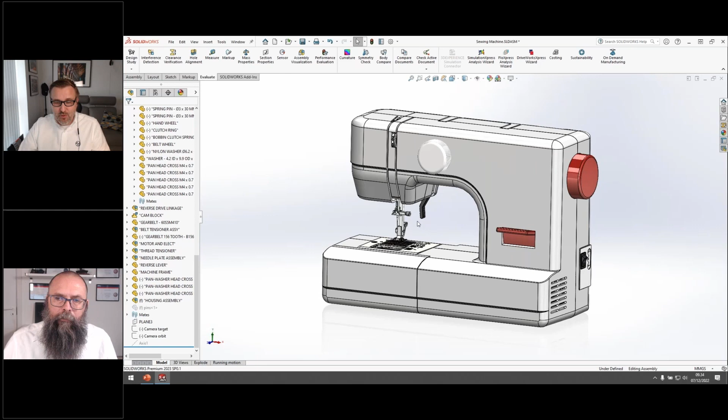Here we can see we have a sewing machine, and I have all the mechanism inside. A sewing machine can be a difficult work tool. There's a needle going up and down, so we need a little warning label on the inside here. So I'll just go in and open the part, turn around a little bit, and then on this surface I would like to have a warning label. If I right click, you can see there is a comment option down here, and I can go in and say add comment, and now we can go in and see - I want a warning label here, please.

So there's also options to go in and put in a screen dump of how the model is orientated, so it's easy to see how it's orientated. And we can also go out and browse and put in pictures from other sources, so we can in fact put in where the labels should, how the labels should look.

Sometimes if you have a lot of comments, you need a way to sort them, what is important and what is not important. And we can do that with different colors. We have different colors up here, and each of the colors can also have a description. If you click the little gear here, you come into options, and you can see here we have the description we could go in, so we can go in and say we want this to be warnings or something like that.

I'm just canceling out. But one thing is that it is important, and we want to emphasize that there's something important here. But what if people don't see that as a comment? Then there's an option so that every time we open this model, this warning or this comment should pop up so we can see it. So now I just press save and we'll just close everything here.

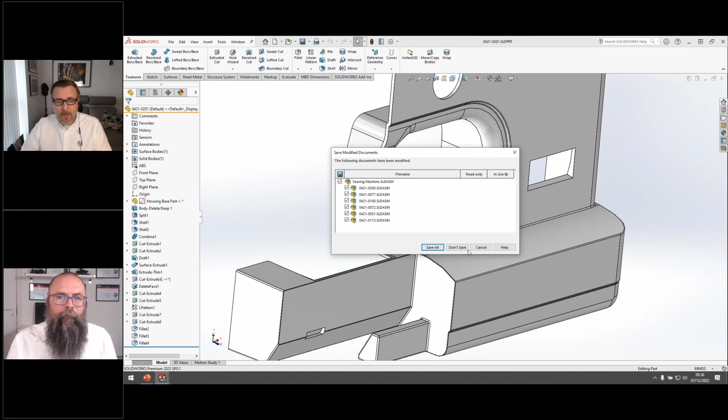If I go in and say open, you can just take it from the recent files. You can see here the comment come up to tell me, hey, remember this, this is an important part. And when we have taken care of it and I put the label on, we can simply unclick it up here and it will not show up every time we open the model anymore.

Sometimes we have a user, our favorite supporter, could be Lennart, running around helping us with stuff on a computer, or it could be a coworker. Maybe they can't find the toolbox they want to have, so they go in and turn on all kind of toolbars and so on. And then I'm sitting here with toolbars over here and toolbars over here. I don't really want that.

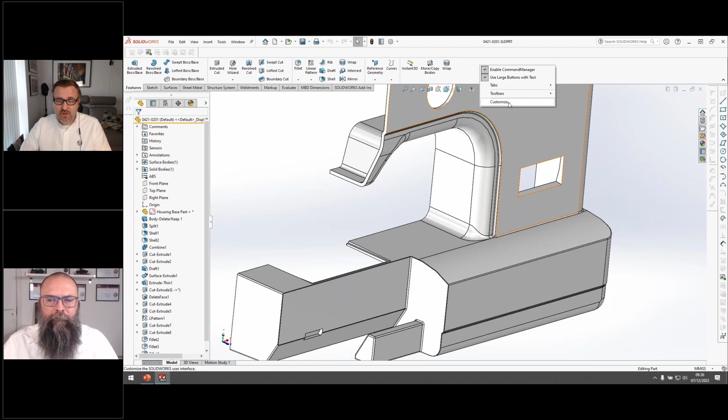So now I can, of course, as in previous versions, go in and say I want to reset that to default. But with 2023, I can go in and say I only want to reset the toolbars. I don't want to mess around with resetting my command manager at the same time. I, of course, can also reset everything. In this case, I'll just reset the toolbars.

Some things, when you reset your user interface, will not be updated before we restart SOLIDWORKS. So it'll come up with a little warning about this. Next time you restart SOLIDWORKS, you will see all the changes and all the resets.

And then we have this enhanced graphics. If you go in under options and under performance, we have this enhanced graphics performance. It can also only be turned on and off when you restart SOLIDWORKS.

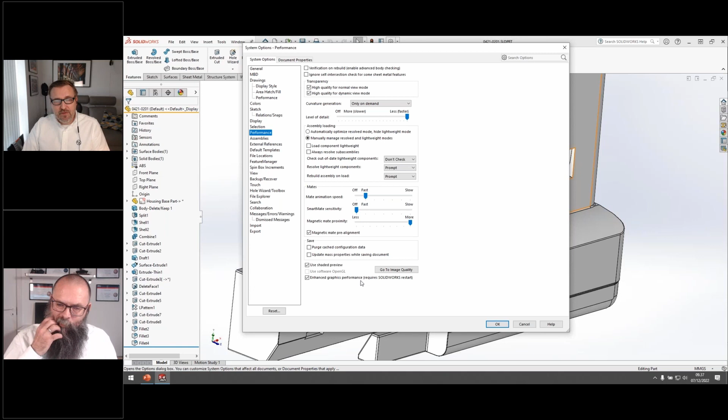If you don't have a check mark there, you will be running on a graphics kernel in SOLIDWORKS that is like 20 years plus old. They have rebuilt a new one, and that's the one you run when you turn this on. But the benefit is that it can utilize the whole graphics card you have in modern machines and modern graphics cards, where previous versions could simply not use the modern graphics card. So it's very important that you go in and turn that one on.

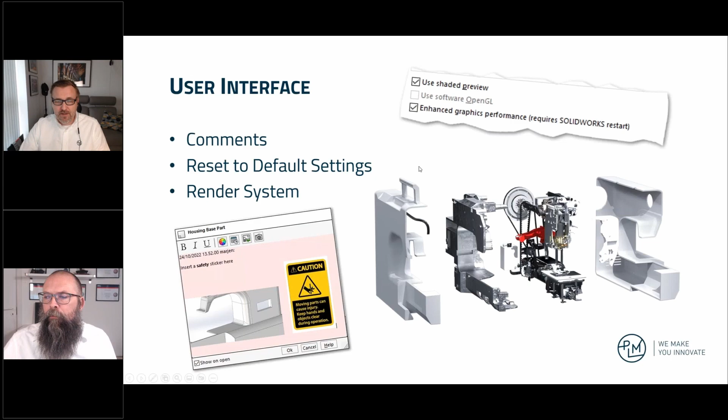And one of the things they have done in this version is they have updated zooming and rotating. We have a little video here where you can see how it looks if you have it turned on and if you have turned it off. You can see there's a big difference between the two performances.

Often you go out and buy a really expensive computer with a lot of hardware, a lot of graphics power and things like that. But if you don't use that option, you don't utilize it, and that will be a shame, spending money on that.

Sometimes we hear that people have to deselect that because they get graphics errors and things like that. Most of the time, if not all the time, we have found out that is simply because the graphics driver is very important in that step.

So we have made a guide on how to select and install the NVIDIA graphics driver. If you go into the SOLIDWORKS website and look for what graphics drivers have been certified, they are way behind. If you have a graphics card that's 2 years old, you will have a driver that's 2 years old or something like that. But go into PLM group, either DK or EU or whatever country, click on support, change this up here to English, and then search for select. There comes up an option here, select and install NVIDIA graphics driver. And there we have an 18 step guide on how to select and install the graphics driver.

And if people are using this one, we have seen very few problems with it. Often it is related to laptops where you have to go in and remove or deselect, so you cannot see the internal graphics card that is on the CPU, the Intel graphics card. And as soon as that takes effect and the driver from the Intel graphics card is uninstalled and things like that, we don't see any problems.

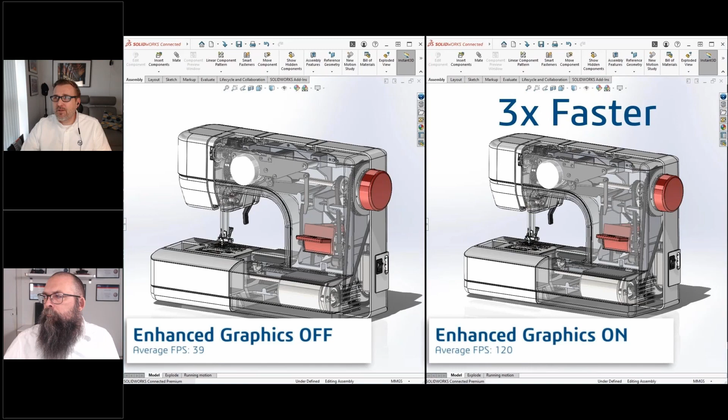So Lennart, do you have some tips and tricks for us now?

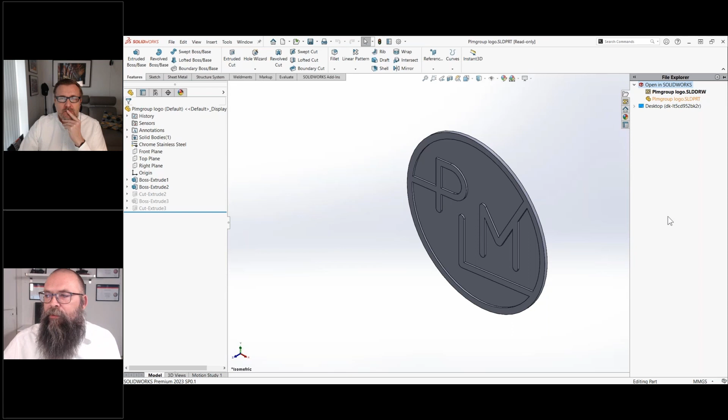One thing I want to show you is the color picker here. If we go and just click there - as you know, we can set colors to our different features, they can get different colors, but you can also use the color picker.

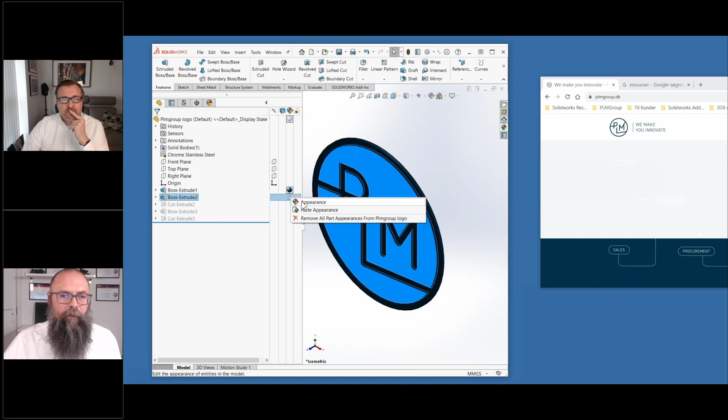I'm going to make this a bit smaller, and select our website here. I want to add our website colors to this model. What I do on the color picker is hold down the left mouse button and drag to where I want it - here, for instance - and then you can select the color. We can also go to appearance, and this time I just want my own background here. Great, so you get this light blue background.

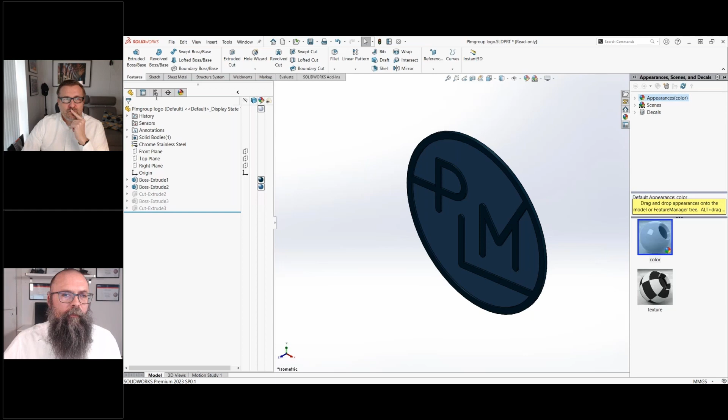This looks nice. As you can see, I have a few different features that are suppressed, because I have a few different configurations. But how do I know if some of these features are actually not in use anymore? Because when you work on a part, you can get a lot of features that you no longer use.

So one way to clean them up is to use purge unused features. What you do is right-click on your feature tree, and go to purge unused features.

Here SOLIDWORKS will tell you which features are not in use, which features are suppressed on all of your configurations. So I find this one, boss extrude, that is suppressed. I'm just going to press OK.

And then it's deleted - it will still keep the sketch, but you can just run it again if you want to. Purge unused features - oh, there we go, the sketch is no longer in use. Let's see what happens. So now I have cleaned up my part, and you won't have as many features.

And that can also be used on assemblies - you purge your assembly for any parts that are suppressed and no longer in use.

Martin, are you ready with the next step? Yes, I am ready to take over.

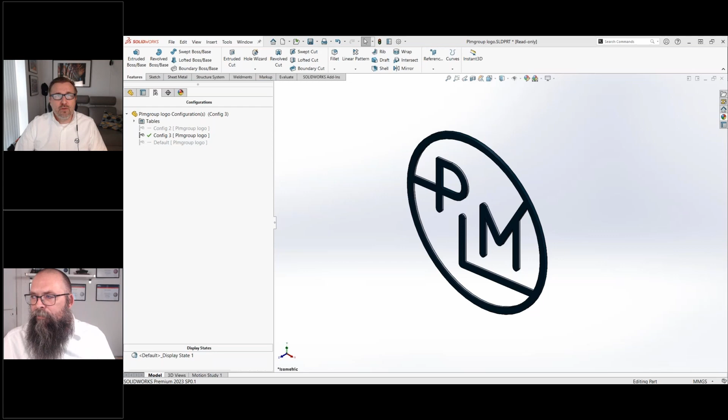There is also one thing about that purge you showed on part that will also work in assemblies, where you often have both mates and components, and it could be really difficult to see what's what in the system. So you can in fact go in and run this purge on assembly level, and that way you can see what is not shared, not in use in any of the configurations.

Great, thank you - so a very good tip to clean up the model, especially if you get a model that somebody else has made.

Back to the news in SOLIDWORKS 2023, now we go into and look into parts and features.

One thing we have when making a wrap feature is a limitation in previous versions: we could not use a single line font, it had to be a double line font, splitting the surface into multiple surfaces. With 2023, we can have just a little line directly on the surface.

We now have the option to add library features, even if there are errors in them. We can put them in and edit them directly into the model, without having to go back and change the library feature to get it in the first place.

We have the option to add construction lines to the ellipse, like we have on our rectangle, such as a center line or corner to corner. Now we can also have the main and small axis of the ellipse, making it much easier to put relations on.

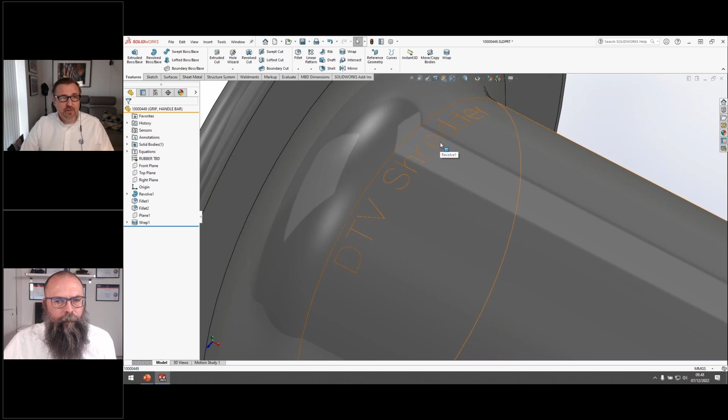I use my wrap feature and wrap it up to this surface. In a previous version, it had to be like in the E, where you can see an inner surface and an outer surface. With 2023, we don't need that limitation anymore, so now we can have a font like this and use it.

We'd like to have a logo here on the end surface, and I have it here in my design library. We can see the anchor point is a little off compared to the text, so we get an error.

But we can just say OK, and now we can go in and edit the sketch. Set it to normal to, select everything, and move the logo into the position we like to have it. I don't have to go back and edit the library feature in order to get it in correctly.

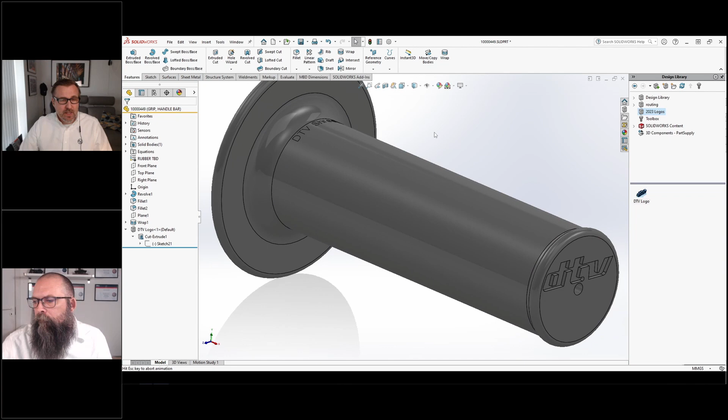There's a new hotkey, the Q key, where we get all the planes. We can select a plane and say I want to add a new sketch on that plane, and as soon as I click somewhere else, all the planes disappear.

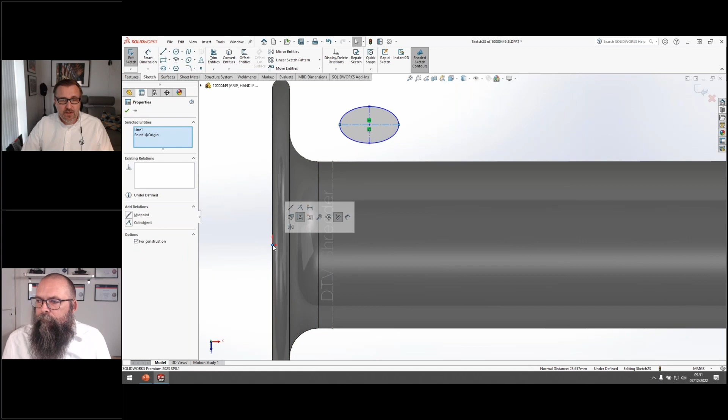If I use my ellipse, you can see I now have the option to add construction lines, and I get the main and minor axes. I can click on these lines and make relations directly, so now we can control where the ellipse is.

If I use dimensions, I can click directly on the line, and in this case we'll add this to a global variable called length and place that in.

I want to have a distance up to this edge of 3 millimeters, and I want the small axis here in the ellipse to be 3 millimeters, something like this.

You can exit the sketch, and we'll just put the model directly in isometric. I can say I want to extrude this 3 millimeters.

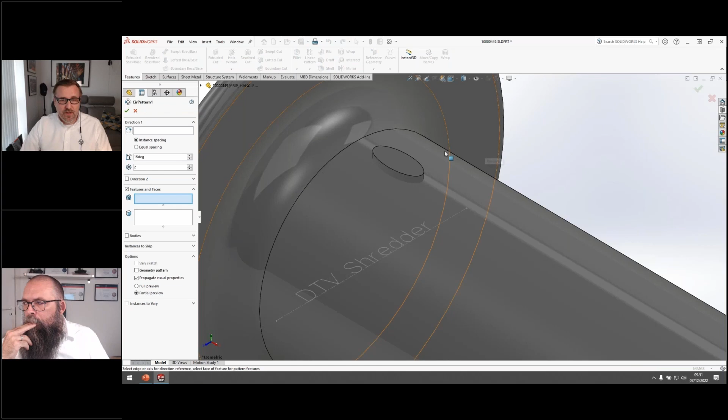Now I remove the merge result because I want a body I can work around with, without the rest of the model. So we can say I want a circular pattern, to get an extra body a little to the side like this, 15 degrees, and we'll just have 2.

If I use this move body, I can move this body right here, and in this case we use a global variable to control where it's placed. We'll use the spacing, but only half of it, so I'll divide that by 2.

If I click on this move feature, you can now see I have the dimension.

So you have a dimension that you can use both in configurations and design libraries, but you can also just go in and click it. In previous versions, you had to go in and edit the feature in order to change the dimensions.

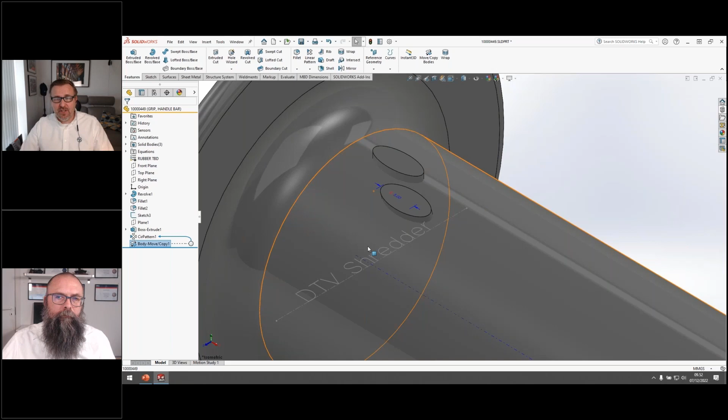For this move, we want a little more, so I go in and click the surface here to rotate around that one. I want both bodies, and in this case we want equal spacing, and I want 12, so we get all the way around in a nice pattern.

We'll also want the length of the model. I'll just go in and click the surface here. You can see we have a little arrow down here, so I can easily check what direction my pattern will be in.

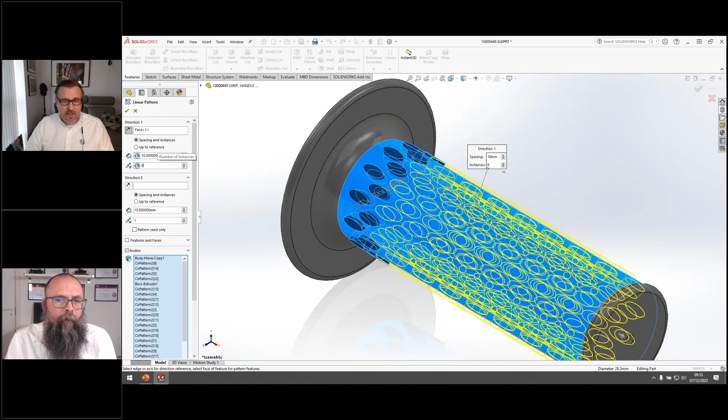I go in and take the bodies, and I'll check all these bodies, and we can go in and see I have the pattern. Now I can say I want this to be controlled by the spacing, and this one will be the instances. Just don't need that 8. And now we have the pattern right here.

Sometimes there comes a day and Lennart came to me and said, okay, we don't want those sizes, we want something else. So now I can go in and manage in equations, because now we have all this pattern controlled by the equations we have in here, or the global variables.

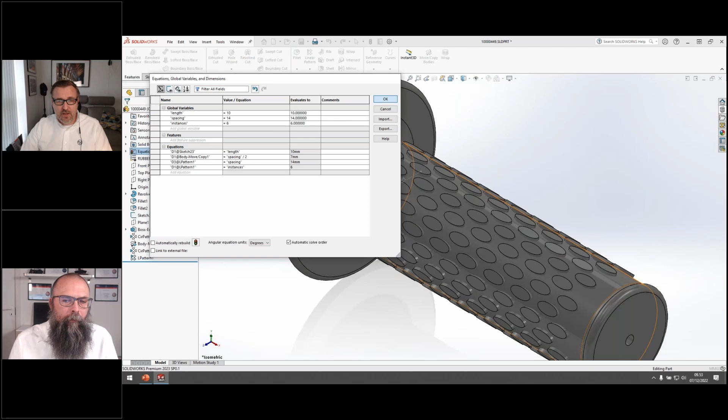So now we can go in and say we want the length of 10, we want the spacing of 14, and we want 6 rows down the length of the model. And I can go in and say okay, and now we can see the models updating.

A model like this, if you go in and put that into an assembly with a lot of these components, it will be heavy no matter what. At least if you put in 1,000 more, it will be something that will take the performance out of your model.

So in SOLIDWORKS, we have this where we can go in and defeature the model, where we can go in and remove details that aren't important in the assembly. And you can go in and now I just click next.

In this case, we want to have all the holes, because there are some holes that are important for mating or something like that when we put it into the assembly. SOLIDWORKS will now, based on the selection I've chosen earlier, come up with a preview, and then we can see the preview over here.

You can see we have not removed that many details. But if I go in and click here and say I want this feature, the main extrude that I made, it will automatically take all the child features with it.

So now I can go in and say next to this one, and now you can see I have a much simpler model that I can use in my assembly.

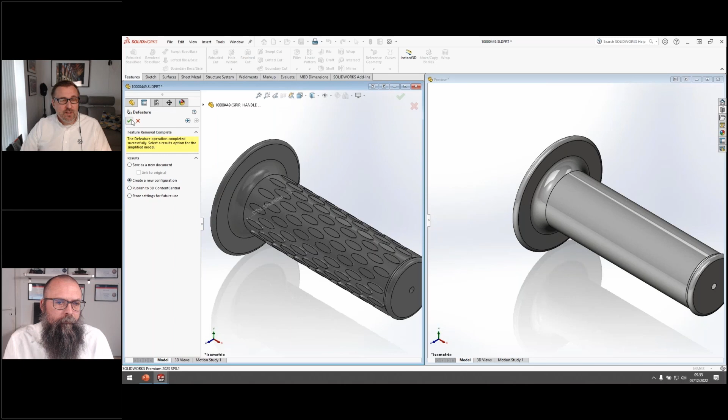And now I can in fact go in and create a new configuration. Simply say okay, and now I have 2 configurations, a simple one and one with all the details. And now I can simply, depending on the assembly, just select what configuration I need.

Maybe in some areas I need the simple one, and in other areas I need to have all the details, because you can see the details. But often it's not something you can see in the whole assembly, and you can take benefit of a simpler model. So that was something about the parts and features.

Lennart, are you ready? Some tips in the parts and features area? I am. So I've created this, and you'll see later why I have one called wrong.

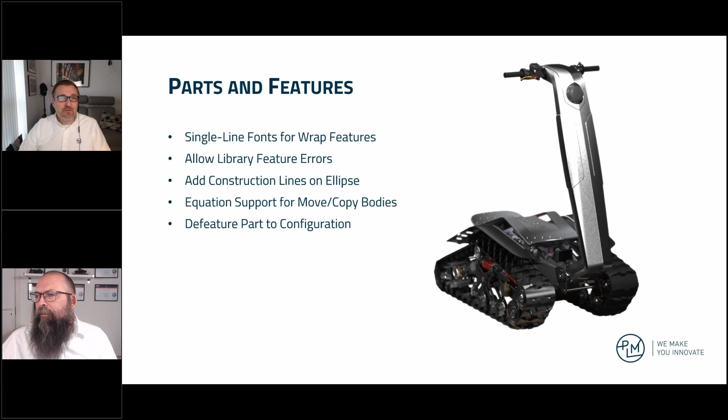Oh, I'm not sharing my screen. Yeah, you need to share your screen first. It makes it a lot easier for the rest of us to follow you. I think so. So sorry, there we go. We can see the screen now, yeah.

Great. Okay, so I have this called wrong model. You'll see why later.

So for instance, if I want to create a small extruded cut here, I'm just going to create a sketch. There we go.

So with this extrude, I can use the increments down here to increment the length of my extrude cut, and I can use the arrow keys to increase my increments. But what if 5 is not enough?

What if you say, okay, every time I want this to be 10? Well, then of course we can just go to options and go into spin box increments.

We can set this to 15. Let's just say 15. Oh, 10 I think is better, it's more obvious. And I'm just going to try again to extrude cut. As you can see here, if I use the arrow key, it increases by 10. So you can set up your increment in whatever way you want.

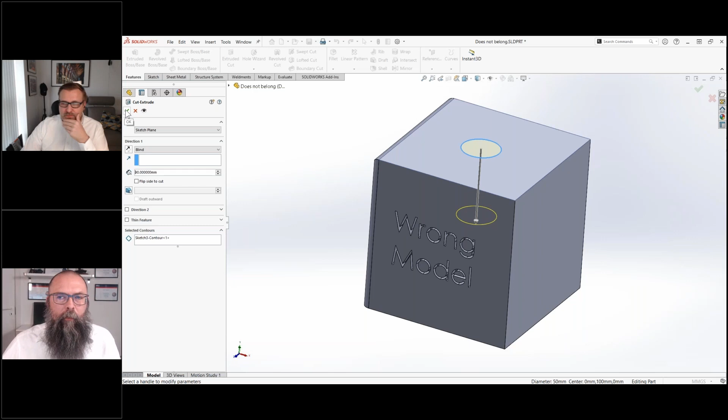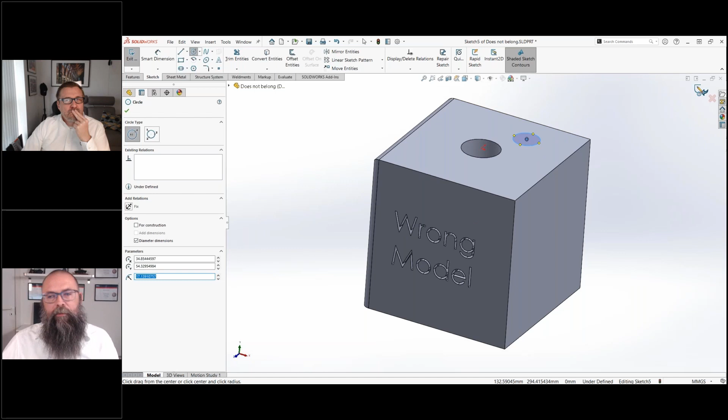I'm just going to create another sketch here. When you create a sketch, go out here, for instance, and there we go. So if I want to exit this sketch, I can move the mouse up here. But if you have this widescreen, you can just press the D button, and the exit sketch button will appear right next to your mouse pointer. So there we go, I'm not going to use that.

One more thing I want to show is the ability to copy many of your features to your model. For instance, I have this wrong model. If I hold down the Control key and drag the feature to your model, then you can actually copy it. Okay, that's okay.

And the same thing with fillets. If I want to copy them, hold down Control, drag the fillet to where we want it. There we go. And I also want one here, I guess. There we go, that looks special. So it's also a quick way to copy the different things you have already created.

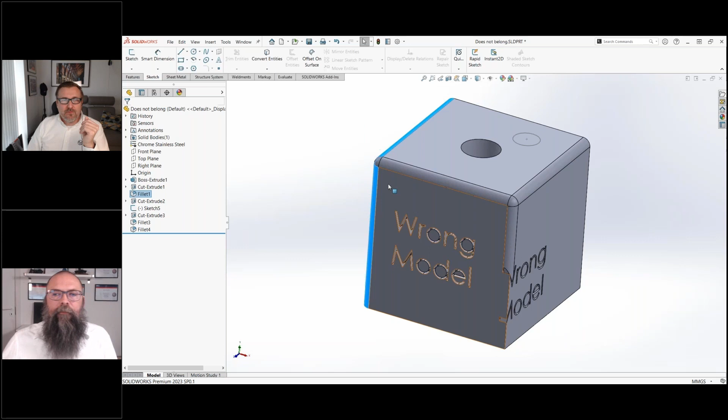But what if you have a more complex model? This isn't that complex, but if you have a complex model and want to select the line behind here, you don't want to rotate your view. Well, you just right click on your model, and up here you have a select other option. This option gives you the ability to select other things than just what you point at. For instance, here I've selected the face. I can also select other faces if I want, the sketch, get contours—that's an easy way. If you have a very complex model, select other is a very good feature to use.

And I think that's about it for now. Yeah, I think that's all I had for parts and features.

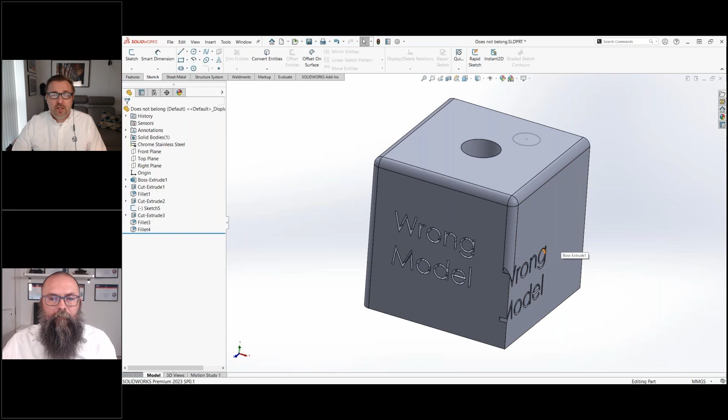Another little thing: you move a feature from one surface to another surface in the same model, but you can also copy to another model. So you can simply have two windows with different models, and you could copy a feature from one model to another. You don't have to go out and make a library feature or copy the sketch and things like that—you can simply take the feature and copy it from one model to another model. It's a very easy way to reuse stuff from one model that you need on a new model or a new version of the model.

The first thing is that skipped instances in patterns can now be configured. So when we go in and make a component pattern, we can now skip the steps. In the previous version, we had to suppress the different ones, make the full pattern and then suppress. I'll show you in a minute.

We can now control the default configuration that will show up in a bill of materials. Then we have some extra options and a little clarification on replace component—it's much easier to see what's going on, especially if it's a command you don't use very often. Repair missing mate references is also giving a little more feedback.

Magnetic mate can now be controlled by configuration. So if we have different configurations where maybe not all the magnetic mates make sense in all the models, we can now suppress them.

And then additional end conditions for assembly level cuts. In previous versions, when we made an assembly cut, we didn't have the same options as in a part. When sitting inside a part, we could do a lot more than in an assembly. They've now caught up, so we have exactly the same options in an assembly cut that we have in a normal cut inside a part. Then we have one here called propagate assembly features to toolbox part.

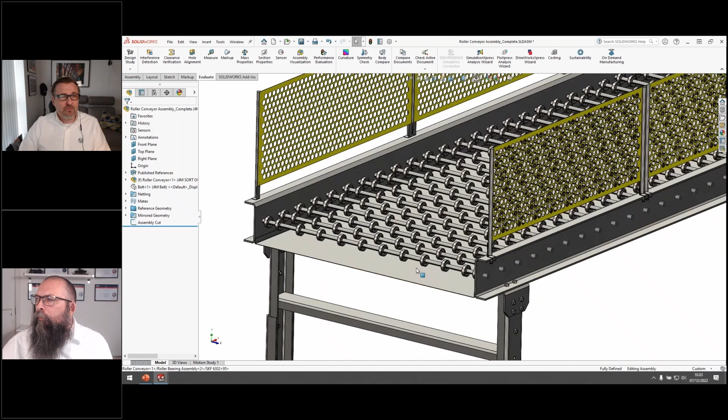You can see here we have an assembly layout, and to start with we'll work on this little conveyor down here. I'll just open this sub-assembly, and we can see we have it in here. If I go in and hide the conveyor, we can see we have a lot of axes, and on all these axes there are a lot of roller bearings. They are very expensive, so we'd like to optimize that a little bit.

So I'll just go in here and open this sub-assembly and see what we can do in here.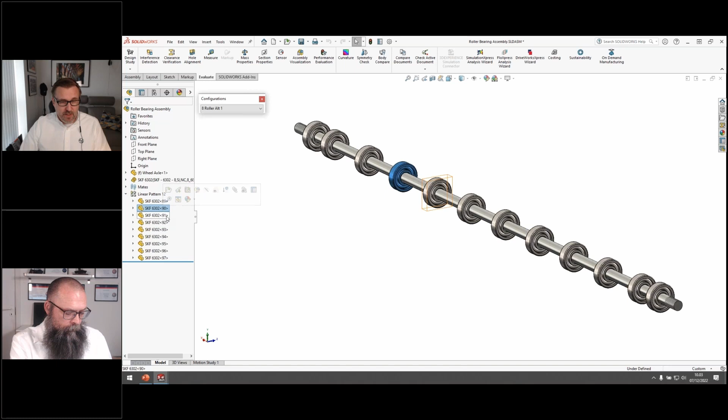First of all, we'd like to have different configurations. I've already made some different configurations here, and I want to remove some of the roller bearings. In previous versions, we had to go into the pattern and select, okay, I don't want this one, and I can skip these two as well, and then go in and suppress them. So now if I go into the other configuration, you can see different components are suppressed.

But now we have 2023, so we can go in and use skipped instances, and you can see there's an icon for configuration, so we can control which configurations we're skipping in. Now I can just say I don't want these 4, press OK, and now we can see they're not showing up in our pattern. In previous versions, you had to make the full pattern first and then go in and suppress what you didn't need. Right now you can simply say, I only want this in my pattern.

So it's a lot easier to control for us, but also less calculation time for SOLIDWORKS.

Inside the configurations, if we go into properties on the configuration, we can control what will be shown inside a bill of material if we use this as a sub-assembly. It defaults to document name, but in most cases we want the configuration name. So I can click OK now, and I've changed that.

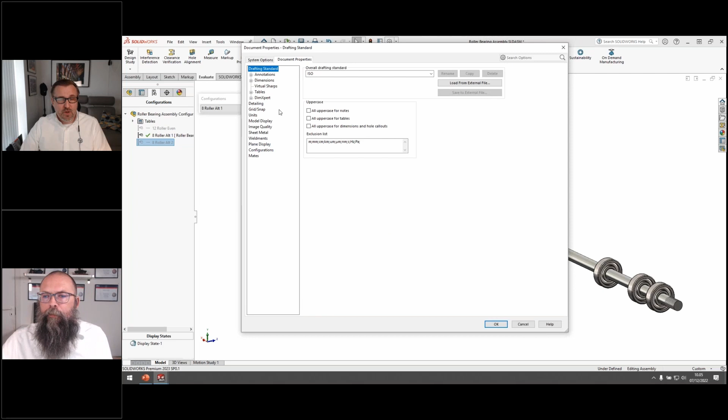But every time I make a new configuration, I have to go in and make sure that it's set to that. There is now an option in the document properties, so it follows the document, where you can set that configurations should use the configuration name. That will be the default bill of material part number for new configurations, so it's an extra step we don't need to spend time on anymore.

One thing is that we have reduced the number of roller bearings, but let's say we've also found some other type of bearing we can purchase that's a lot cheaper and does the work. So now we can go in and say, I want to replace this component down here. Just go down and find my replace component.

It more or less looks like we're used to, except this little area here. Now you can see we have 3 radio buttons. In previous versions we only had a checkbox, and that was all or not all, and if not all, you kind of needed to know it would replace whatever you had selected up here. In this one, you can say, okay, now it's set to only the selected. So you have feedback making it special for people who don't use this command very often, so they know what to do. And then we have an extra option called all in the same parent assembly.

So we have an extra step in here: what will we replace it with?

We have a rubber wheel out here. I can go in and put that in instead. On purpose, I will deselect the reattach mates, because then I can show you about repairing missing mate references.

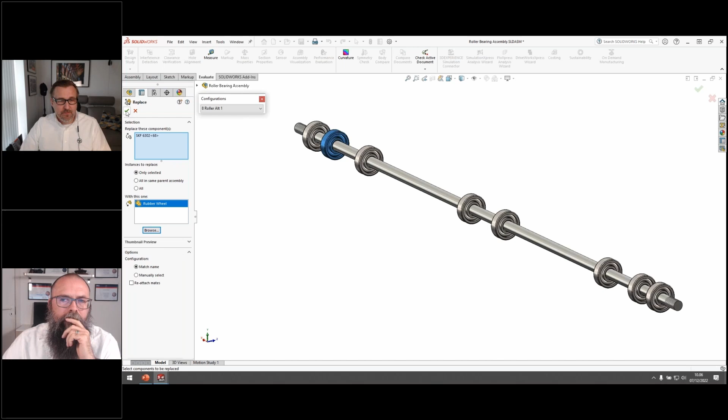So I'll just say okay, and you can see we got some errors out here. There is one mate in this case that has failed. We can right click and use auto repair, or do that on the mate group as well. Now we get feedback up here saying what has been repaired. We can go in and edit, or undo. If you just ignore that little box, it will disappear after a second or two. So we get some feedback on what it is we have changed.

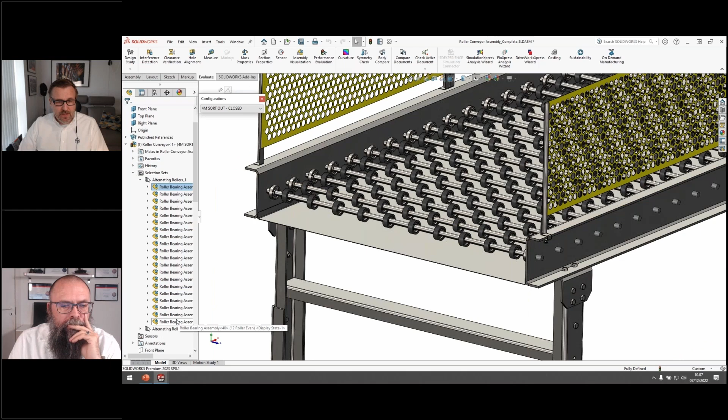Let's jump back to the conveyor here. I have some selection sets, just have to find them, they're up here. I can see I have 2 selection sets here. I can go in and say all these, I want them to be the new version 1 of the alternative axis. Now we can go down and take this one down here, like this. And now we can see we have reduced the number of bearings a lot.

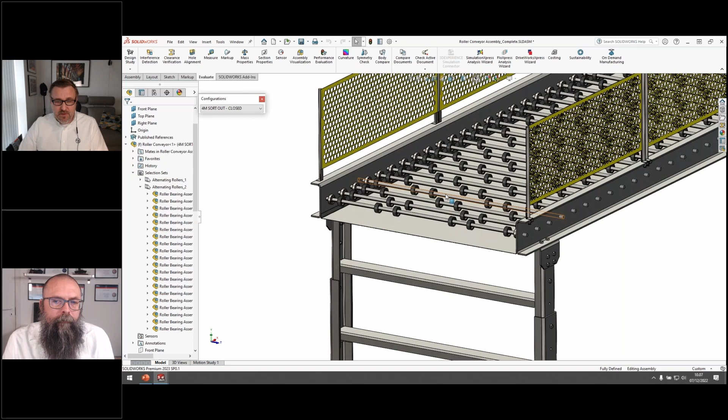Plus we have changed it to a cheaper version. So we have saved some money on the project right here. Now we can go in and put back the conveyor.

Sometimes when you're sitting with an assembly, you need to make what we call an assembly cut. We need to do some changes on the model, but we do it on the assembly level because then we can cut multiple parts with the same sketch. And we know if we change that sketch, it will update whatever needs to be updated on all the parts.

So I have a little sketch here, and if I go in and use my assembly feature cut that is located down here, I can now go in and cut with that. In this version, we can use all the options that we are used to in cuts. In previous versions, the assembly cut had fewer features than we have in a normal part.

Now I can go in and say up to surface, and use this select other that Lennart just showed us to select that surface. I don't have to rotate the model to select the other side. Instead of saying okay, I'll go down here - there's one called auto select, where SOLIDWORKS will automatically select all the parts that will be cut.

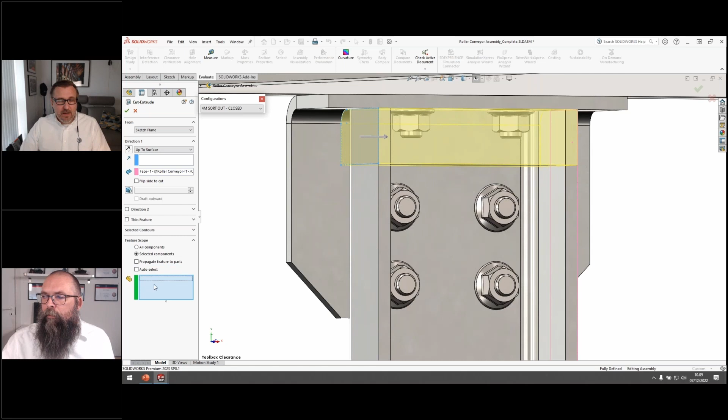I have the option to go in and manually select what I'd like to have cut. You can see I have selected different parts here - there's one part I built myself, and there's in fact a toolbox component. Now I'll go in and say I want to propagate this feature into the parts, so if I open the part on its own, this feature will also be in the part. So I can go in and see how that will look.

But I don't want to do any changes to the toolbox component, and in fact SOLIDWORKS doesn't want to do that either. So it will automatically deselect all the toolbox components, and we get feedback up here telling us what has happened. Now we can say okay to that, I'll just keep all the bodies. So if we go back here, now we have made this assembly cut.

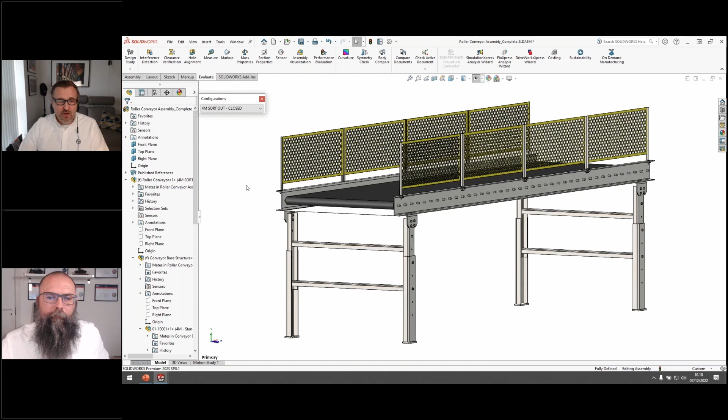In this case, we have this conveyor in different configurations, and one of them is like an 8-meter long version, and there are areas where packages running on the conveyor can go out the side. In our publisher, you can see we have a lot of connection points, both for the side and for the end of the conveyor. But if I go into the 4-meter version that doesn't have any side options, it doesn't really make sense to have all those connection points.

So now what we can do is simply go in and select this, and then we can suppress them. So when I go in and insert this component, they will not show up if I use this configuration. So let's jump over to the big assembly here and look at that.

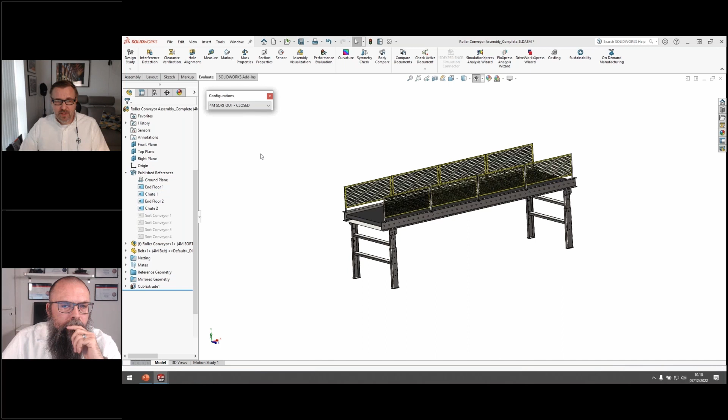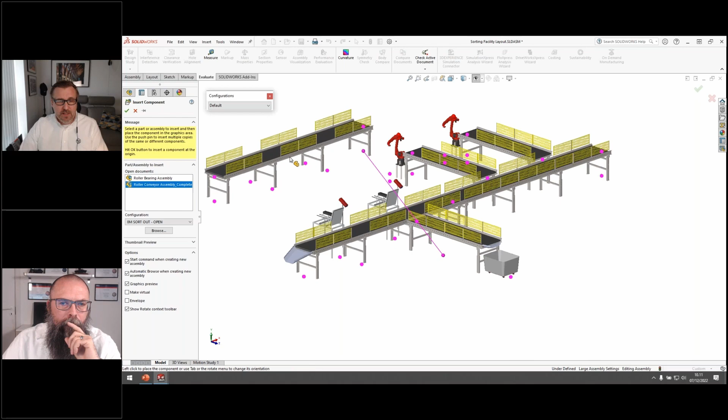So I'll just say I want to put in this assembly, and you can see if I put in the 4-meter version, I have only the 4 connection points. If you go down and change it to the 8-meter version, you can see I have all the 8 connection points that are in the 8-meter version. So a little extra step there where I don't have to go in and do all kinds of weird stuff to get this up and running, and it's much easier to connect to the right points, to the right magnetic points.

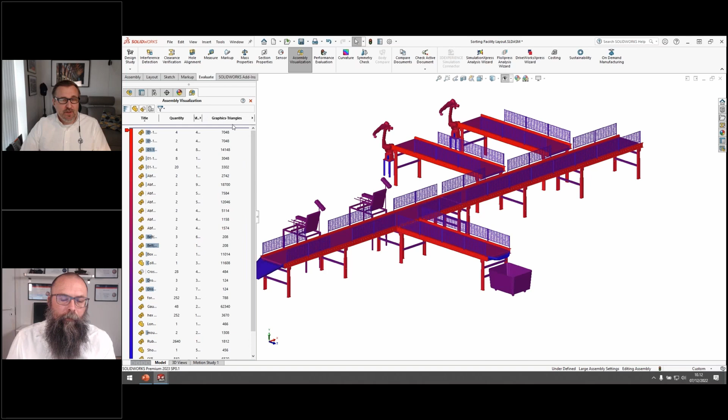We still have some components out here. You can see there is a lightweight one. In a previous version, if I went in and used this assembly visualization, I would come up with a message saying I have to resolve all the lightweight components. I don't have to do that anymore. Now we can just go in and add an extra column, and we can say that should show us the graphics triangles. That will show us which component is heavy for the graphics card to load or show on the screen.

Often you like to filter this out a little more, and you have this line. You can go down here and when you come with the hand, you get a little thicker line, so it's easier to grab and move around, and it will update the model and not show all the components below this line. So it's easy to see which component is the heavy one. It'll come up here because I have not recalculated the model after the changes I've done, so a little warning about that. A little easier to do.

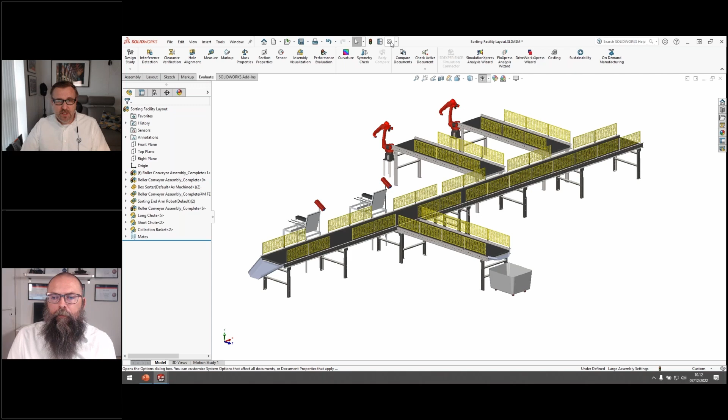Also, when you go in and want to export this to a step file, in a previous version it would get one step file with all the components inside. With SOLIDWORKS 2023, we go into export and into step, and you have the option to export the assembly components as separate step files. So you simply have a step file for all the components, for all the sub-assemblies, and things like that. Especially when you have a lot of parts that repeat multiple times, they will each have their own file, and you have a step file that just combines all those step files.

I have done that because it takes a minute or two to save, but here you can see this assembly has saved out a separate step file, and you can see, if I can find them, here is the step file for the configuration for the assembly we just made, alternative 1 with the 8 rollers. So a very good way to reduce the amount of data you have to send if you're going to send a step file to somebody.

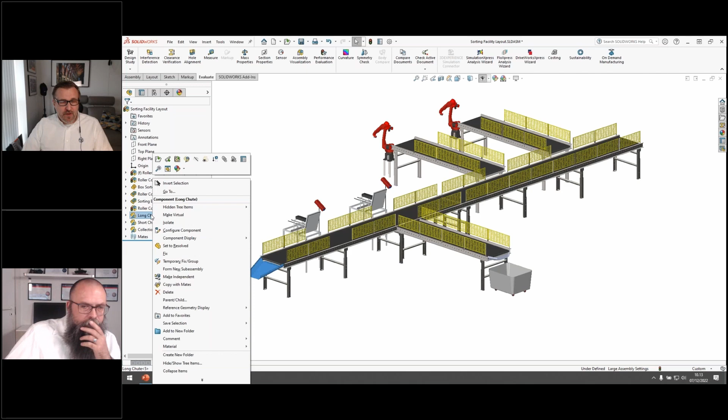When we talk about performance and file size, you all probably already know this: set to resolve, and you go up here and set lightweight to resolve or resolve to lightweight, and maybe you played around with it because you're working with big assemblies. In SOLIDWORKS 2023, we got a new option.

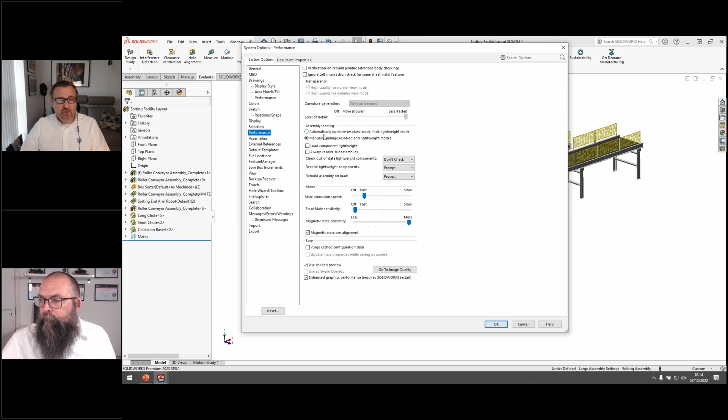So here under performance, you can go in and say automatically optimize resolve mode, hide lightweight mode. So what we're in fact asking is that SOLIDWORKS more or less removes those options from the view that we cannot see, and takes over control to optimize the performance in the background. So if I go in and click this one on and say okay, you can see I no longer have the lightweight feature. And if I go in here, you can see I don't have the option to set resolve to lightweight or lightweight to resolve.

Also another thing is, if I go in and say file open and check this one down here, you can see there's no option here to load in lightweight. What happens is that SOLIDWORKS will control all that in the background. So we have this little example.

This is an assembly that has about 11,332 components divided over multiple levels of sub-assemblies. In the previous version, we could open it resolved or open it lightweight. But we put a little twist on this because we made an error in some sub-assembly, in this scenario, where we'll look at how this can optimize our workflow. So if I just click next, if we open this resolved, we'll open the assembly and find what's wrong with the dialog, with the model. There's an error somewhere, and we'll get that shown in the Feature Manager where the error is.

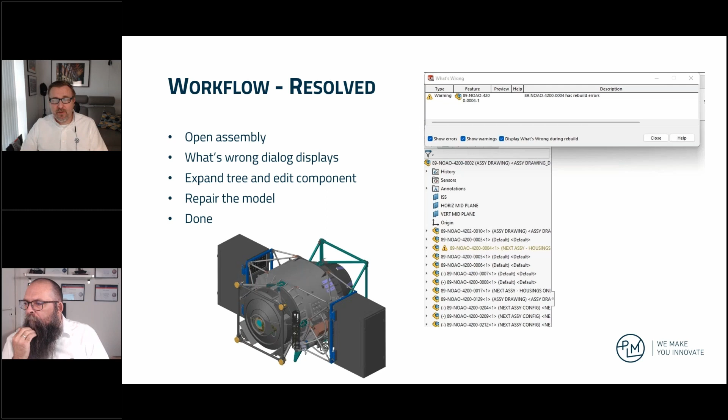We can expand that Feature Manager to that area, repair the model, and we are done. If we are in lightweight mode, we'll still get the what's wrong dialog. And if you go down and look at the Feature Manager, we cannot see anything. So we have to manually find and locate the sub-assembly and the part where the error is, resolve it in order to go in and fix this error.

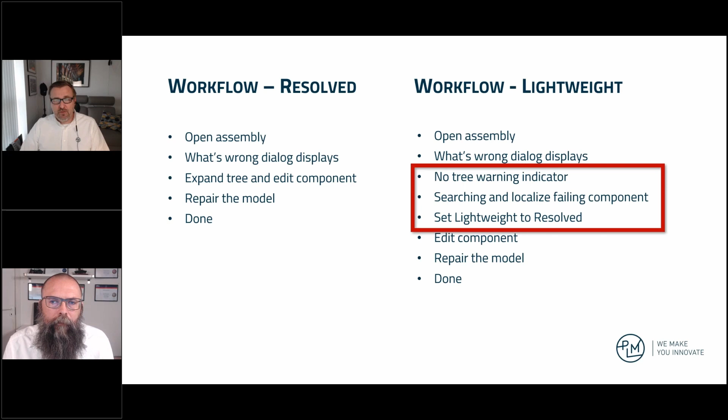So compare those two workflows. You can see we don't have any tree warnings or Feature Manager warnings. We have to search ourselves, and we have to make sure that this component is resolved in order to get it in.

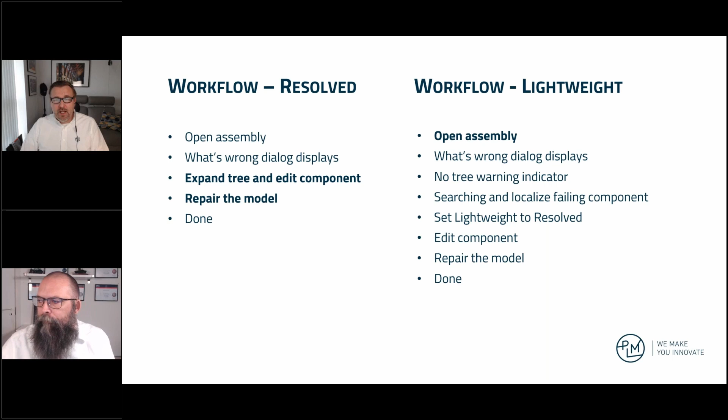The benefit of the two workflow is that if you look at the resolve, we can just expand the tree and we can edit the model because it is already loaded. Lightweight opens the parts really fast.

So what SOLIDWORKS have done here is optimize this. You can now open the assembly. You get the what's wrong dialog box, like in the two other scenarios, but you also get the feedback in the Feature Manager. So now you can just open the Feature Manager, repair the model, and you are done.

And if you take those three scenarios and put them up to each other and look at this assembly, the loading time in resolve is like 2 minutes and 12 seconds on the machine that this test was run on. And it expand and repair the error. The error was just go in an equation box and say reorder the equations because they were calculated in the wrong order. That was the only error there was.

It took like less than 3 minutes. In lightweight mode, it took less than a minute to open the model. But in order to resolve and find the model or find the area, it took more than 3 minutes. In optimized resolve, it took a little more time to load the model, but we'd have the benefit of all the feedbacks. So it's much easier to go in and resolve all this.

So a way to optimize your workflow. And for all the people that are sitting like, yeah, but I like to still control when my model is in lightweight and so on - it's simply just make sure that you don't click this option off, that you want SOLIDWORKS to automatically run it. It will run exactly the same way as in previous versions.

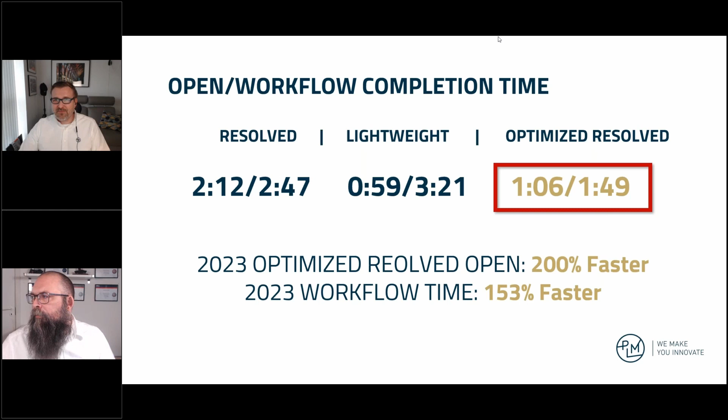I just want to show this tip that didn't work before. When using Pack and Go, you can sometimes - I think most people have tried that - you Pack and Go, you want to send this, but in this case you actually get a file called does not belong. And if you look at your drawing here, your sketch, you can see here you don't have that placed anywhere on your drawing.

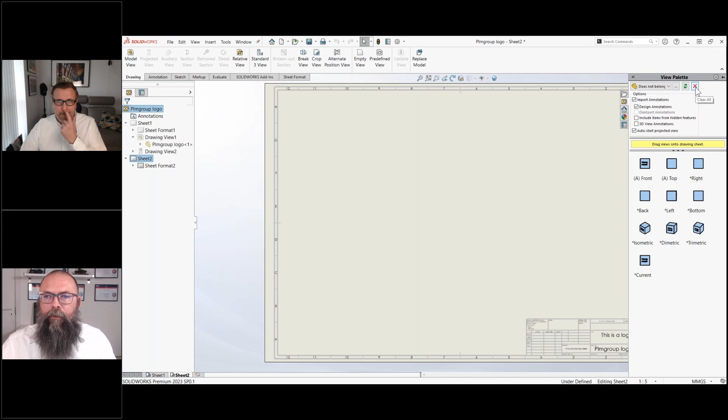So 9 times out of 10, the problem is usually within your view palette, that it's still stuck here. Maybe because you have copied it from another, or something like that, it's still stuck there. If you have saved the file as another name, then this could happen. So what you simply need to do is just clear all and save.

And if we use Pack and Go once again, there we go. Then you only get the ones you want in your Pack and Go. So if we just try to open - let's say, take this one, let's take this - so just want to create a quick assembly with this, and we can of course go to the features and let's see here. Hang on.

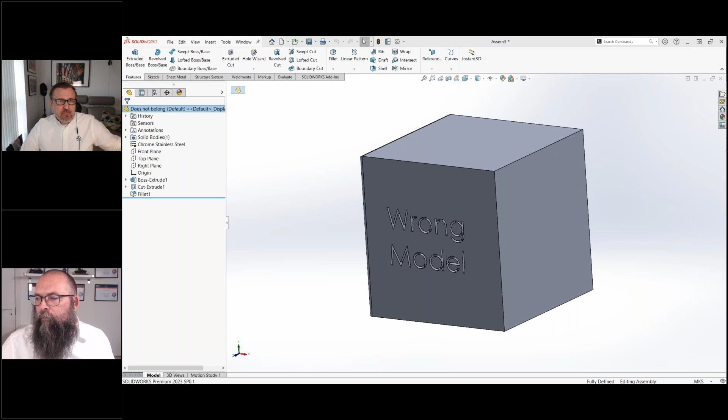Create assembly from - okay, where's that? Okay, just going to create new assembly then. Make assembly from part here. So usually when you insert your part into an assembly, you can click wherever you want here, or if you just click OK, then the different planes - the part plane will align with the assembly plane. So if we have right plane here and the right plane there, they will actually align if you just click the green check mark.

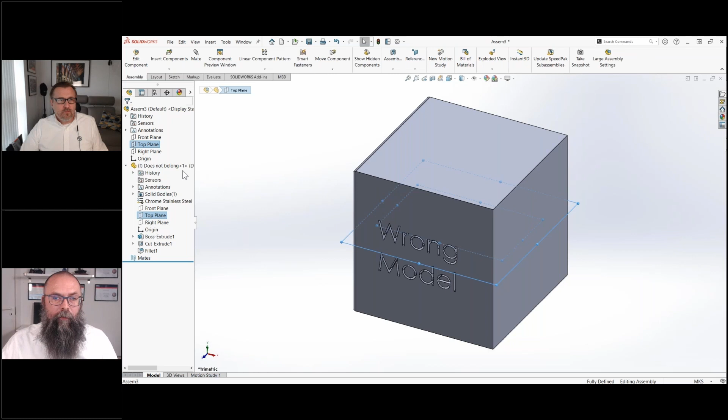If you want to move this, then all you need to do is to right click on it and press float, and then you can make it as however you see fit.

So if you have, for instance, you can quickly, as with the copy mate, you can also copy your models. So if you want these to be part of a sub-assembly, just quickly mark them all, right click, and form new sub-assembly. Doing this will form an internal sub-assembly within the main assembly, but you can also save it as an external sub-assembly so you can use it in other files.

I can see there's a bit of a time issue, so I think we're just going to jump right to the drawing parts. Is that okay with you, Martin? Yes, sir, I can do that.

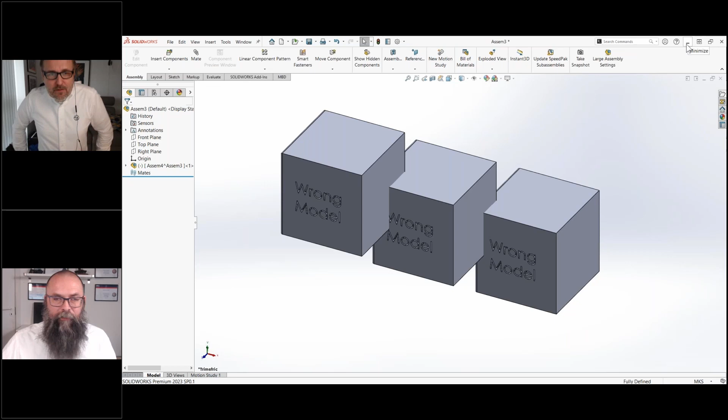Just a little thing about creating a sub-assembly inside an assembly. If there were mates between the different components that you put inside the sub-assembly, those mates will automatically go into the sub-assembly. But mates to other parts not going into the sub-assembly will go outside the assembly. If, for example, you have two mates going to different places outside the sub-assembly, you might get an error, because the sub-assembly will be rigid and try to control what those two components are. The mates in both directions will also try to control where the sub-assembly is, so just be aware of that. It can be a little tricky with the mates when you do that, because some mates go into the sub-assembly and others do not.

And if you get into trouble, just call support. Normally it's because you're trying to control the component both with the sub-assembly where it's placed and a mate from the outside. Yes, there's often one or maybe two mates causing it. Sometimes when you create that it feels like everything breaks, but just keep cool and go in and make the sub-assembly a flexible sub-assembly. Exactly, that's also an option.

Well, let's jump to the drawings. First of all, we have some new options about opening drawings directly from the drawings, so we don't have to open the model first and then open the drawing. We have a way to go in and override the values in a bill of materials and now get feedback showing what we have changed. We have an auto balloons option to add quantities directly into that. We have some filters so we can filter a bill of material if we just want to see what is purchased or what's made of a special material or something like that. And then we have the option to see through transparent objects. We could kind of do that when we had the model shaded, but now we can also do it with normal hidden line visible or hidden line removed option on.

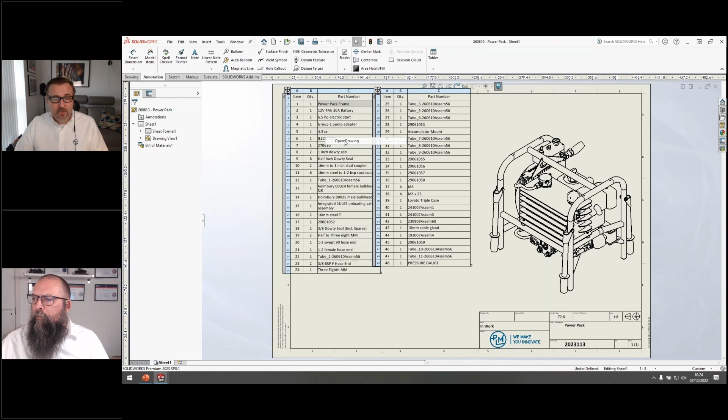I can also do it directly from the bill of material. You can see I have an open drawing option, and I can also open the assembly, but I'll just open the drawing. We can also do it directly on the component, where you can see I have an option here to open the drawing. So it's an easy way to open the drawings I need without having the extra step of opening the assemblies as well.

And this is released.

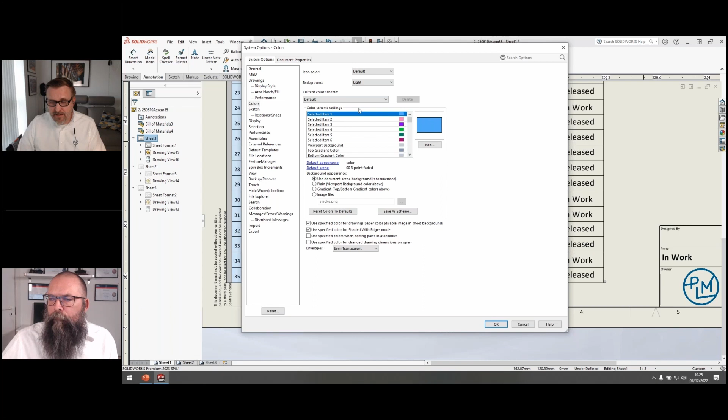Right now I have already changed something in this bill of material, but you cannot see it. It's because we have to go in and set the color we want to see when we have made changes. So I'll just go into the options, find the color settings, and down a little you can see something called drawings modified cell in the bill of material. I'll set this to red, click okay, and come back here — absolutely nothing has changed. I still cannot see anything.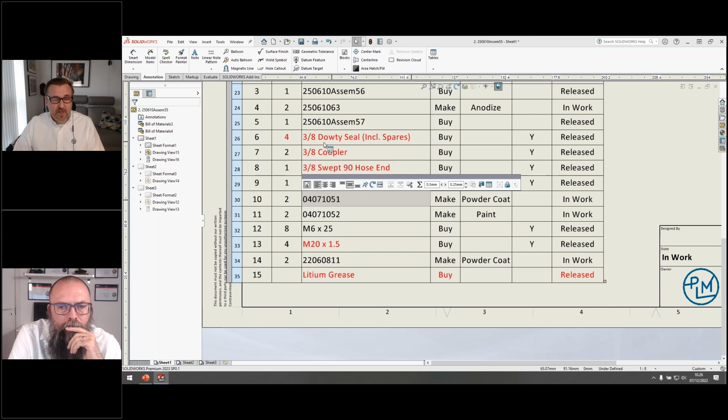It's because every time we're not editing the bill of material, we just want it to look like a normal bill of material. Not everybody needs to see what we've changed inside it. But the second I click inside the bill of material, we can see that all the changes made show up in red. I can also go in and restore the original value — there's two items here, two in the quantity of this component.

If we go up to the view, we can set auto balloons, and in this case I also want to have the quantity. I just want the little x here instead, and I can put that on the model. Now I'll say okay and we can see how that will look.

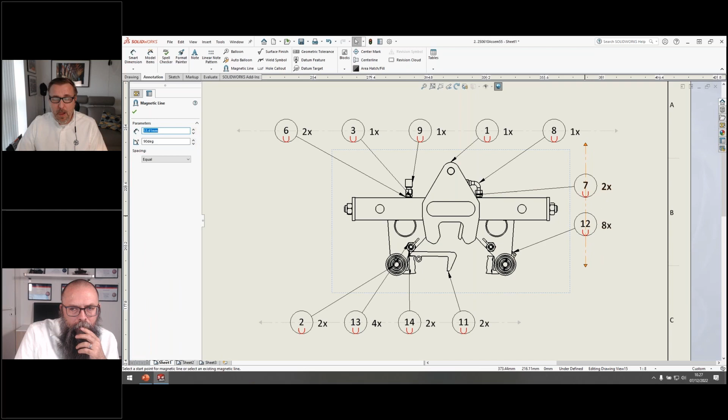Let's say we want this one over here. There's a little tip and trick about the magnetic line for the balloons that also works in other versions — an easy way to make sure your balloons line up nicely on a straight line and things like that.

These four up here only have one quantity, so we don't really want that. So I can go in and overrule and remove the quantity display for the balloons that don't need it.

If I go to the other sheet, we can see we have a big, long bill of material, so we want to filter it a little bit. Up here we have small options boxes, and now I can go in and choose to just see the ones that are in work, so I can see what components are still being worked on. I also have the option to clear all filters.

I see everything again. I can also filter for everything with something like 250 in it, but you can see that starts to be a hassle if I need to select everything, because the descriptions are more or less unique for everything.

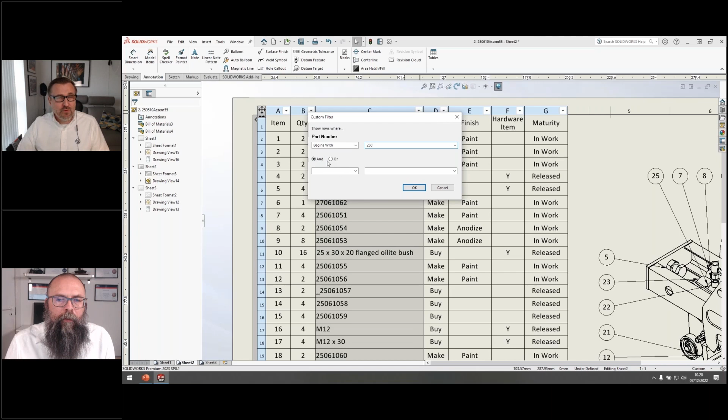What I can do instead is go into custom filters and make my own filter setup. I can say I want everything starting with 250. I can also add other rules with an 'and' or 'or' expression in between, and now we only have the components starting with 250.

I'll just clear all the filters again, and now we can look at the source. I want everything that we buy, but I also only want the things that are hardware — an easy way to filter out what we need in the bill of material.

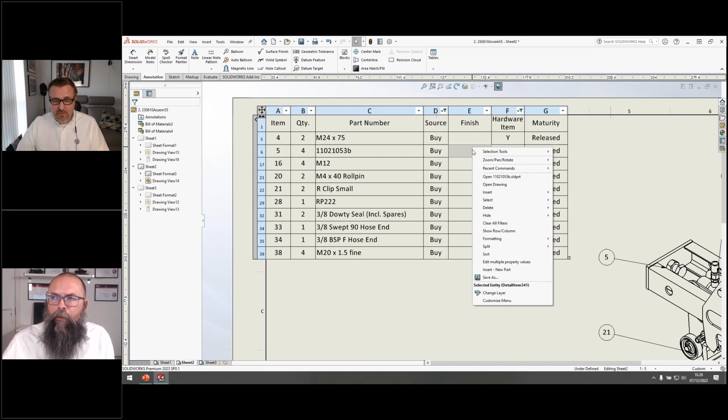If I go in and save this as an Excel spreadsheet, I'll just overwrite the one from yesterday and include the thumbnails. Yes, we want to overwrite that one. Yes.

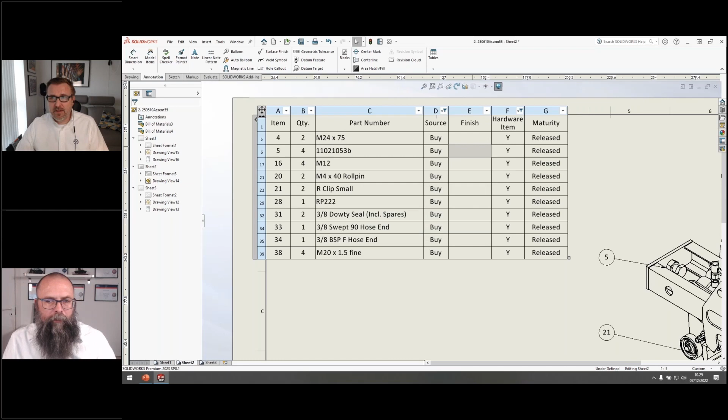Now you can see I have a new version here, created today. If I open this Excel file, we have everything that is a hardware item marked yes, everything with source buy, along with preview pictures and everything. So it's an easy way to control what you'll see inside your bill of material when you export it, or just in the drawing.

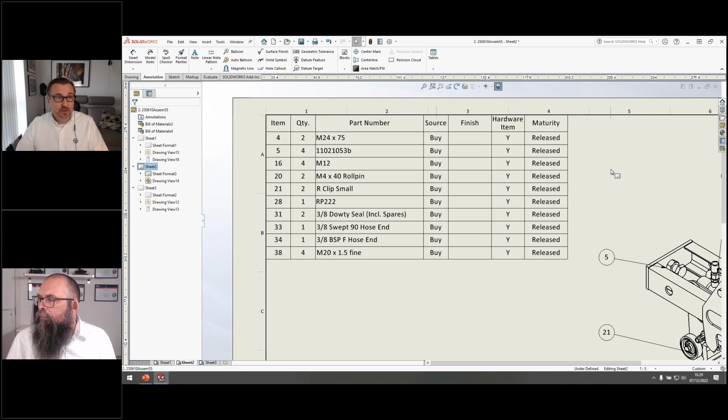So now we have this pressure gauge. Pressure gauges often have a glass in front of the dial, so you cannot mess with that. If I go in here and set it to shaded, you can see nothing changed, I cannot see anything. That's because if I go into the assembly, the component is not set to transparent.

When I go in and set it to transparent, I can see the dial. If I go back here, we can now see the dial inside. But if I switch to a normal line drawing view, I cannot see anything inside the dial. Let's see the dial inside the pressure gauge.

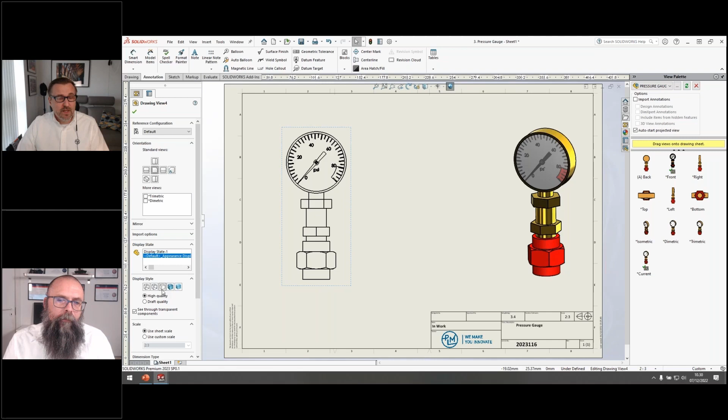But now we have this option: see through transparent component. If I select that, I can now see the dial even while in the normal hidden line removed option. This is also a system option.

So if you go into document properties and detailing, down here is 'see through transparent component.' If I select that and create a new view, I can take the same one and place it, and it will automatically select that option. Of course, I can deselect it if I don't want this in a particular view.

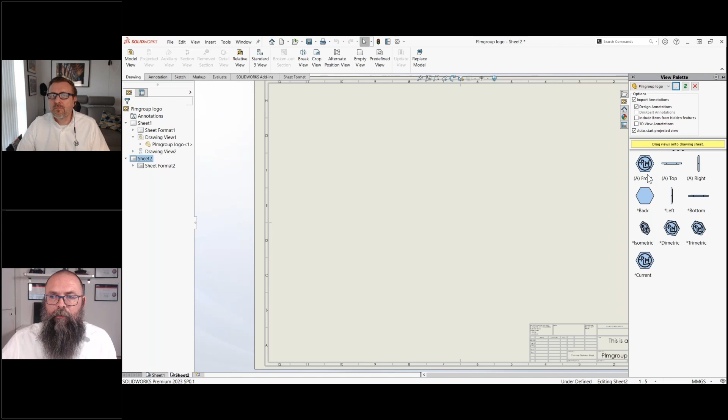I want to use this one for instance. When you create your drawing views, you can actually import your dimensions. So here, if you just remember to click import annotations and design annotations, you can drag it in, and then you will have your dimensions.

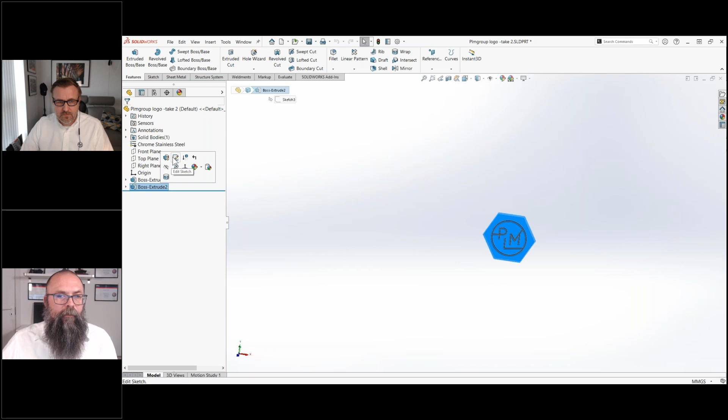One cool thing about this is you can actually change your dimensions from here. So if I want this to be 1400, and just rebuild, great - that actually changes it. If we look at the model, we can see here that it has changed to 1400. So that's a very cool way to import your different features.

What you can also do - I just want to close this drawing here. One thing you can also see is if you have changed different dimensions. So if I say 'all,' you can see if you change a dimension within a drawing. If I take this and change it back to, let's say, 1250, and then go and open the drawing...

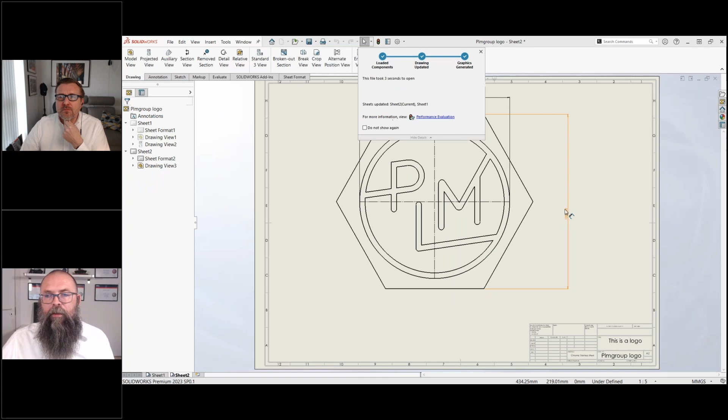For some reason I didn't remember that, but that's okay. Then you can see here that my dimension has an orange color, and that's something you can set up within your options, within your colors. Down here you can use a specified color for changed dimensions on open. So that is also a very cool thing - you can see if a dimension has changed since the last time this drawing was saved and opened.

If we create a quick projected view, one thing we can also do is move your dimension from one view to another. So here we use the Shift key and just drag the dimension to the other view, and I can move the dimension from one view to another. If I want to copy the dimension, I just hold down the Control key and drag it, and then I can have two just like that.

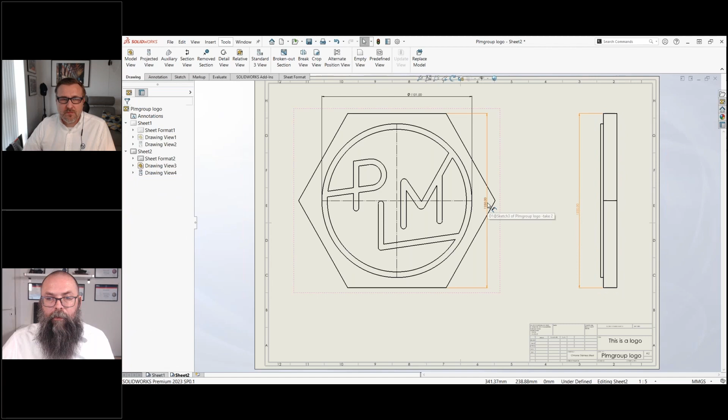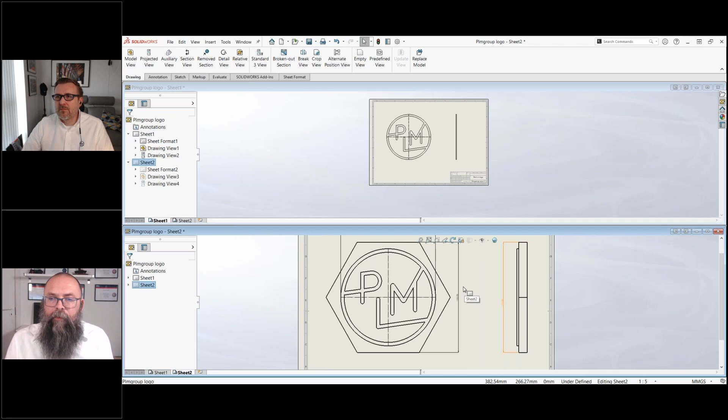One final thing I want to show is how you can view multiple sheets. In this case I only have two sheets on my drawing, but if I want to view both at the same time, while on this sheet I can go to Window and click New Window. Then I'll close this down, say no, go to this one, change it to Sheet 1, and arrange horizontally. Then I can see both sheets at the same time and work on both of them. And I think that's all I had about drawings.